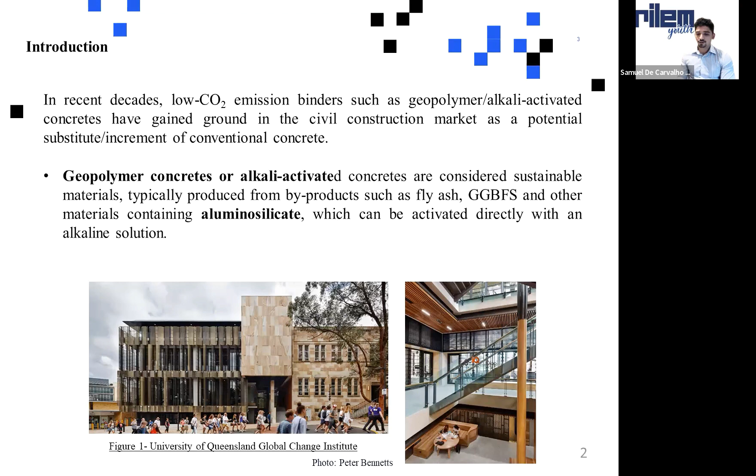One overall picture of the raw materials to produce alkali-activated concrete in Australia. Fly ash, as you know, has been broadly used in Australia for decades. 1.6 million tons each year is used to partially replace OPC in Australia. However, as we've been shifting to green energy recently, we're expecting a drastic reduction of fly ash availability in the future in Australia.

Same case for GGBFS, or slag. In Australia we use around 1.5 million tons, for the same reason as fly ash, to replace OPC and some small applications, but around 0.5 million tons are produced in Australia, and 1 million tons of GGBFS is imported from overseas. Because of this, we're looking for new raw materials to produce alkali-activated concrete and also low carbon concrete to replace OPC.

Recently, calcined clay has been a really strong potential candidate as a precursor for this type of material. A huge amount of clays for alkali-activated materials are available in Australia and around the world. Calcined clay can be defined as a product with a large specific surface, especially from the calcination and grinding of clay-rich materials in silica and alumina. The high purity calcined clay we call metakaolin. Commercially you know this material as metakaolin, but it's very important to define it.

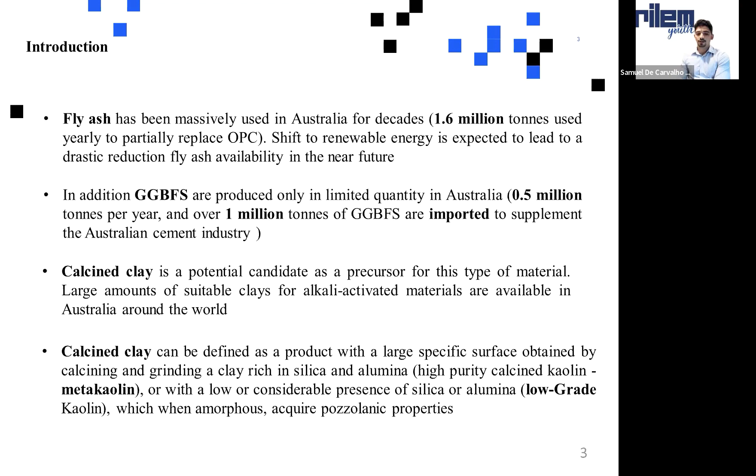and also LC3 concrete. Some studies on LC3 concrete have revealed that the carbon footprint for 2:1 and 1:1 clay is between around 132 and 270 grams of CO2 per kilo, which is much less than the emissions produced by normal OPC clinker.

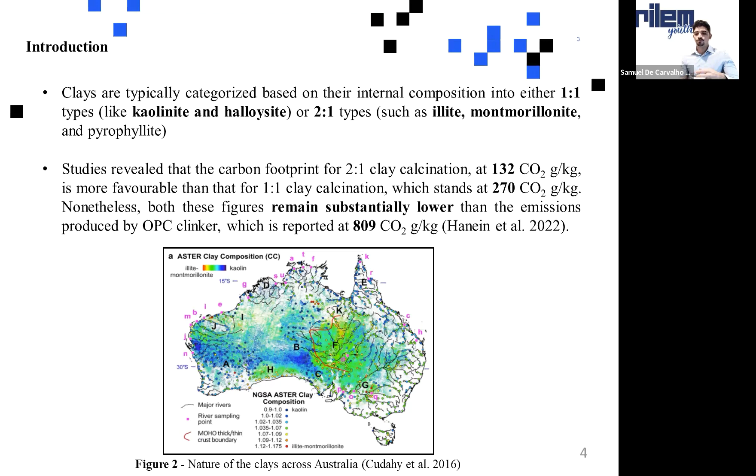The research gap of this specific research inside my thesis was to assess the carbonation resistance of this composite of calcined clay with GGBFS. There are existing studies focused on geopolymer based on fly ash, especially fly ash and metakaolin. However, the carbonation resistance of calcined clay geopolymer blended with GGBFS is still a topic to explore. The influence of the alkaline modulus, the alkaline concentration, amorphous and calcium content on the carbonation resistance of calcined clay is still to be explored.

Also the chloride diffusion of this composite. A lot of studies have applied chloride transport test methods developed for OPC, a natural diffusion method and an accelerated diffusion method. In this project, we're using these results, and a big database from our research group, to confirm if these methods developed for OPC can be replicated on alkali-activated materials. Also, we don't have enough data on the chloride resistance of calcined clay geopolymer blended with GGBFS.

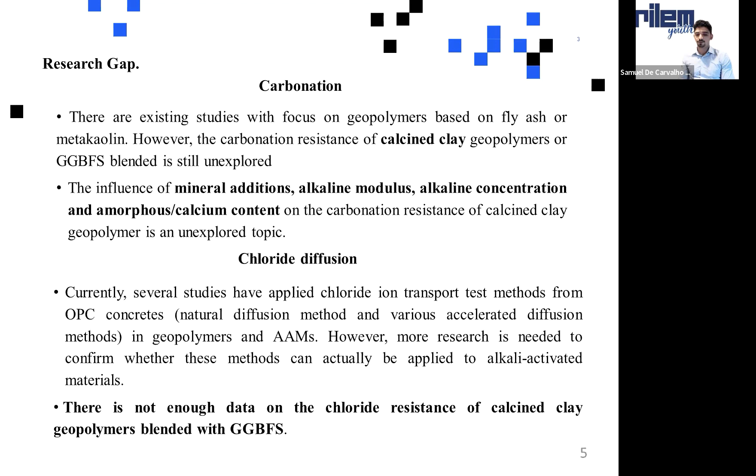The first part of my PhD focused on the carbonation resistance of the composite of calcined clay and GGBFS. I don't have time to explain everything today, but feel free to hit me up later. The objective of this chapter was to clarify how the alkali solution concentration and the calcium content of the raw materials jointly impact the shrinkage process and the long-term natural carbonation resistance.

So this study comprises the examination of the mechanical properties, the pore size distribution, and 1 year observation of natural carbonation trends. Further, we used some electrochemical tests to assess the potential corrosion risk of the steel bar induced by the accelerated carbonation.

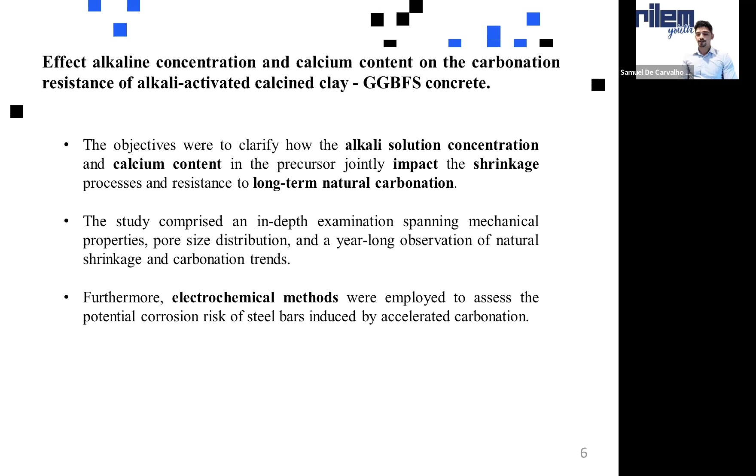So for the materials and methods for the carbonation experiments, that's my chapter 4. I'm showing you only four mix designs, but there are more in my thesis. These specific ones are the ones that had more compressive strength and performed better. So here you can see 70CC means 70% of calcined clay, 30S means 30% of slag, and 8 is the activator concentration, 8%.

We also did the same mix with 70% of calcined clay, 30% of slag, however we increased the activator concentration to 10. Same thing with 50% of calcined clay and 50% of GGBFS with 8 and 10% activator concentration. The calcined clay used in this study was a low-grade calcined clay, as it only has 50% of amorphous phase. It's a commercial calcined clay, imported from France.

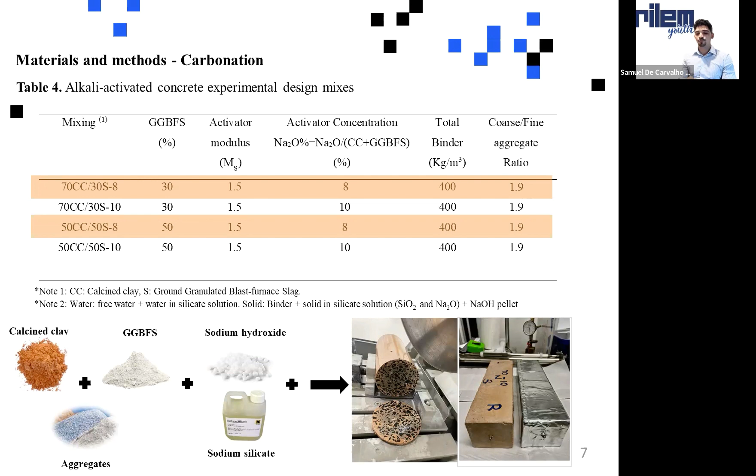When we blend it with GGBFS, sodium hydroxide, and sodium silicate, that's the mix design, and here's one of the samples of the blend, with also the sample for the shrinkage test. So here is the compressive strength for the carbonation test. As you can see, at 28 days all the mixes performed between 30 MPa and 54 MPa.

As you can see, the higher percentage of alkali concentration, 10%, had the highest compressive strength, above 50 MPa. All the samples with 10% alkaline concentration had over 50 MPa, either for 70% or 50% of calcined clay. However, the two mixes with only 8% alkaline concentration had around 30 MPa.

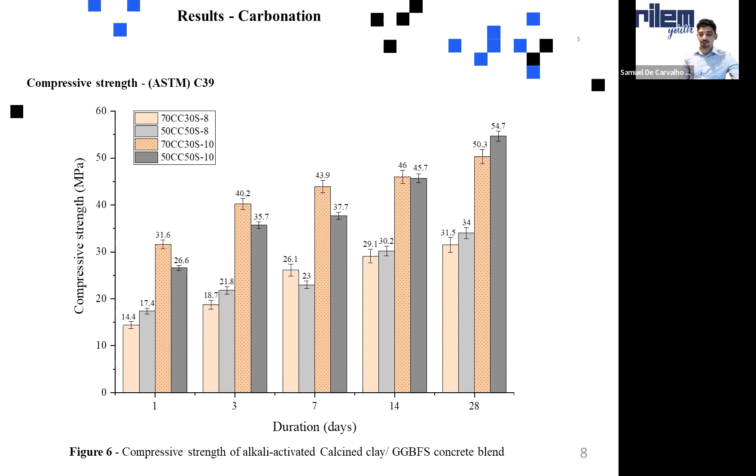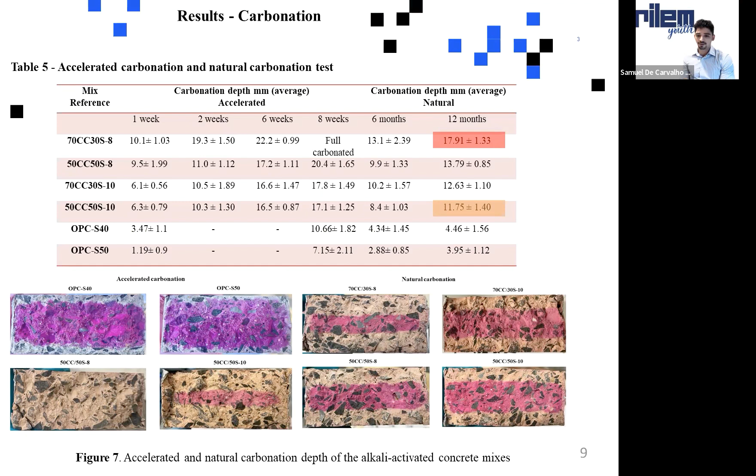A really interesting thing we noted is that the phenolphthalein experiment that we showed before is pretty much calibrated for normal OPC. So as you guys see here, for the OPC, this white area is carbonated. This area is truly carbonated. The pH of this area is something around 9.

So this particular pH measurement shows exactly the trend that not only our study was showing before, but some recent studies showed in the past years: this pH shows that only part of the composite was carbonated, which was only the pore solution. And most of the studies show that this particular pH doesn't pose any risk to the steel bar.

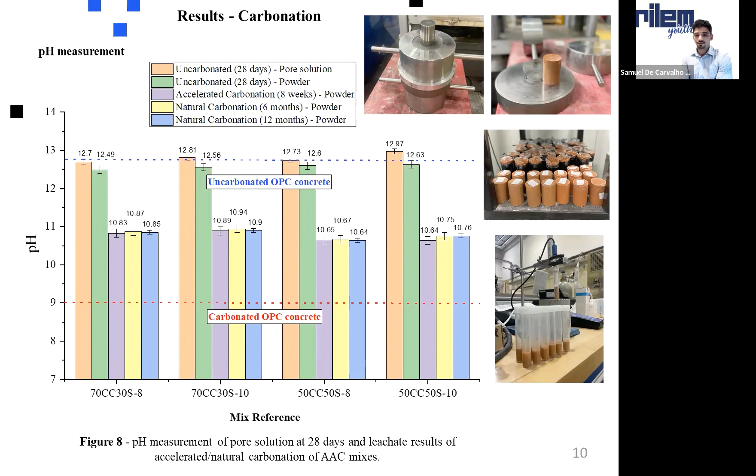So to confirm that, we did some electrochemical tests based on electrical resistivity and steel corrosion potential in concrete based on ASTM C876. So on your right is the sample that we used to perform this test. As you guys can see, there is a reinforcement bar inside the alkali-activated specimen, and we used a similar specimen to the one Dr. Babaee, Khan and my supervisor Castel used in 2018 in their paper.

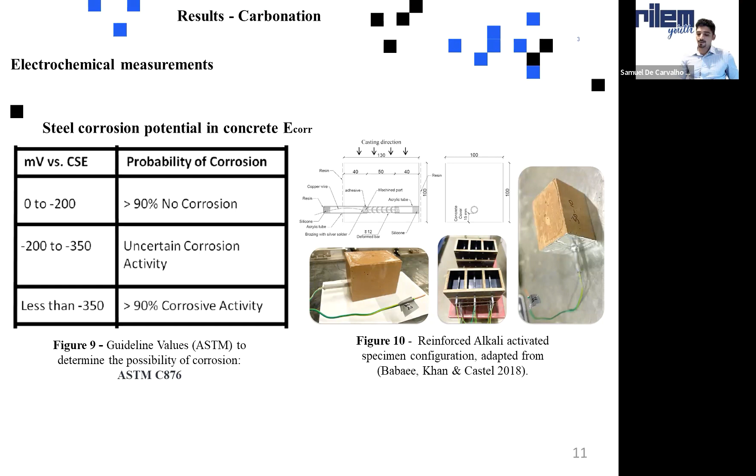So we performed that, and in the results of the electrochemical measurement, as you guys can see, the steel bar is in direct contact with the carbonated area. We used accelerated carbonation for this specific one. And as you guys can see in picture C on the bottom, the corrosion potential shows that there is a really low risk of corrosion of the steel bar, even after 56 days exposed to the accelerated carbonation.

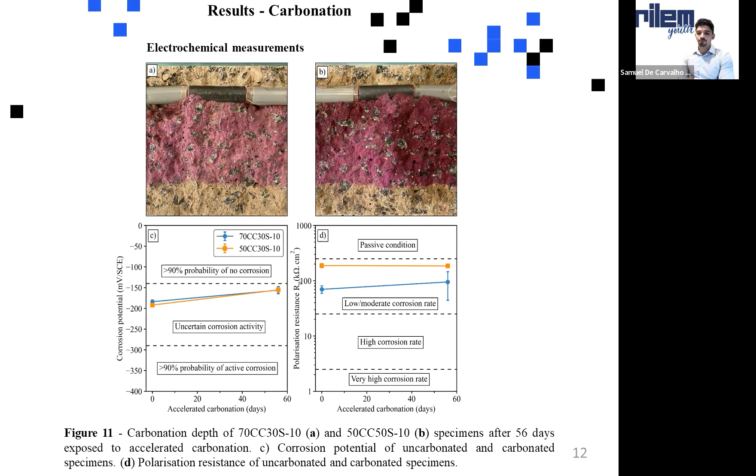So as I showed you before, the pH of this area that shows carbonated is still around 10.8 or something like that for both of the experiments. So on A, this is a specimen with 70% calcined clay, and this is 50% calcined clay, 50% GGBFS. The polarization resistance is also showing a low to moderate corrosion rate probability on both of the samples. So based on that, we drew some conclusions on the carbonation.

So as I said before, increasing the alkaline concentration from 8 to 10% really improved the mechanical performance. After 28 days we have something around 54 MPa for the composite with 50% calcined clay, 50% GGBFS. And the carbonation resistance shows that even in accelerated and natural conditions, the pH is still maintained really high, which prevents steel corrosion. And we proved that with the stable half-cell potential and polarization resistance tests, which confirm a really low risk of corrosion.

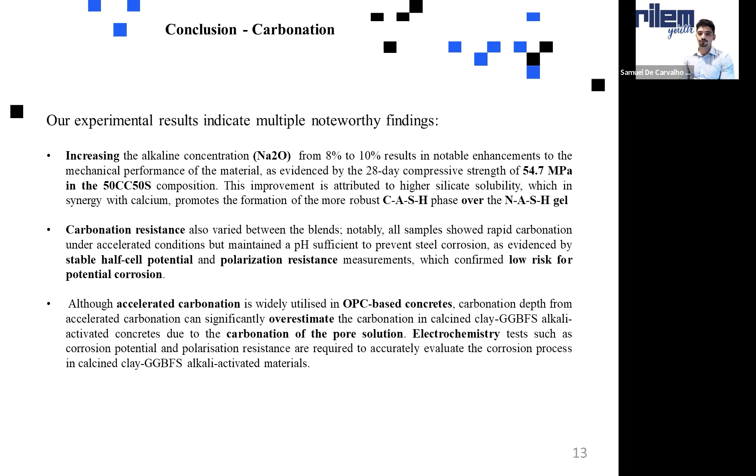So the main conclusion is that although accelerated carbonation is widely used for OPC concrete, carbonation depth from accelerated carbonation can significantly overestimate the carbonation in calcined clay GGBFS alkali-activated concrete, and generally all geopolymer concrete. So electrochemical tests such as corrosion potential and polarization resistance are required to accurately evaluate the corrosion process in geopolymer concrete, and in our case, the calcined clay GGBFS alkali-activated materials.